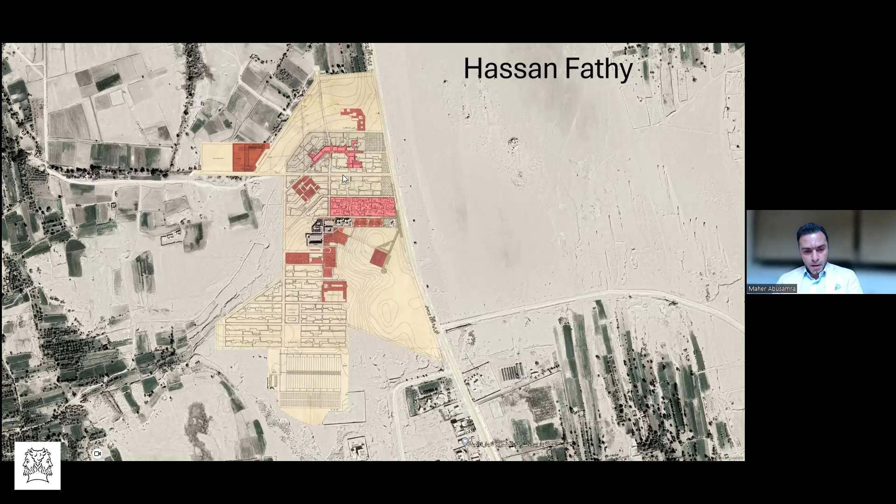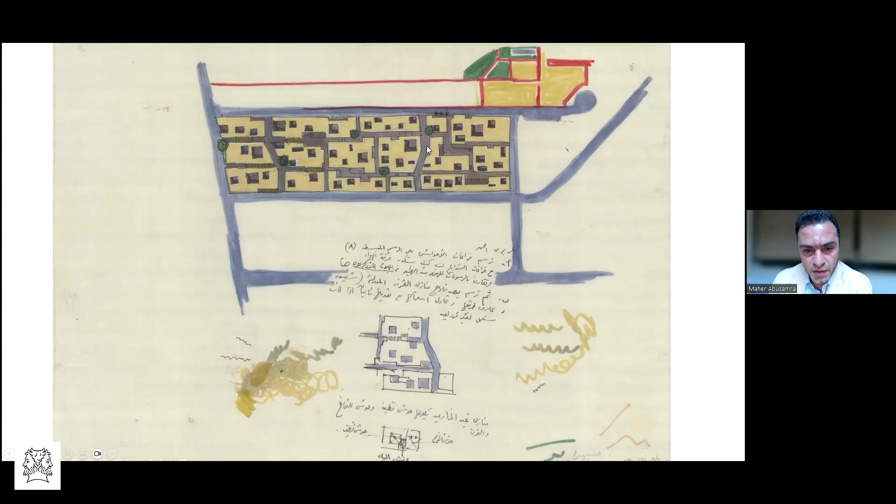Here, this is a close-up of what we have. 1, 2, 3, 4. Some of the project is completed. The rest is not yet. Here, there are original sketches from Hassan Fathy and some instructions about the courtyard and the ventilation, how he imagined that city. Some of the project I even started to draw on computer to understand and feel the module and his design principles. To understand his work, you have to draw it.

Here we can see some of the center of the village on the left, and some samples of the housing and how he can play with the form using that internal courtyard and small street in between. Here also some sketches, original sketches from him.

Then when I was learning Hassan Fathy, when I was looking at the floor plans and the sections and elevations, I saw the drawings are very simple, and you must build that project in 3D on the computer to understand the levels, what's happening in the ceiling, and what's the relation between the walls and spaces to understand the form.

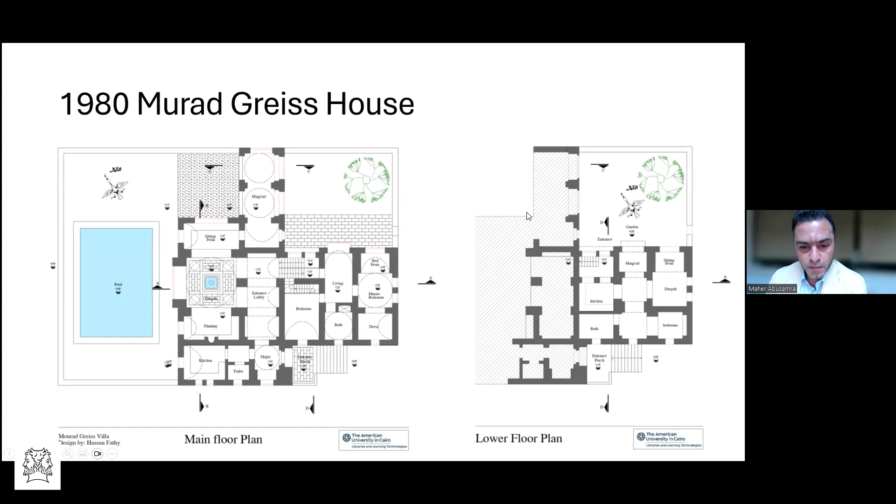They have a lower level courtyard and loggia overlooking the pool. On the right side, you can see the lower level, the stair going down from here. You have the courtyard at the lower level. These are some drawings I extracted from the model itself, some sections, elevations. Here we have an original floor plan from him. And maybe on the left, there is an alternative previous design, not the one which has been built.

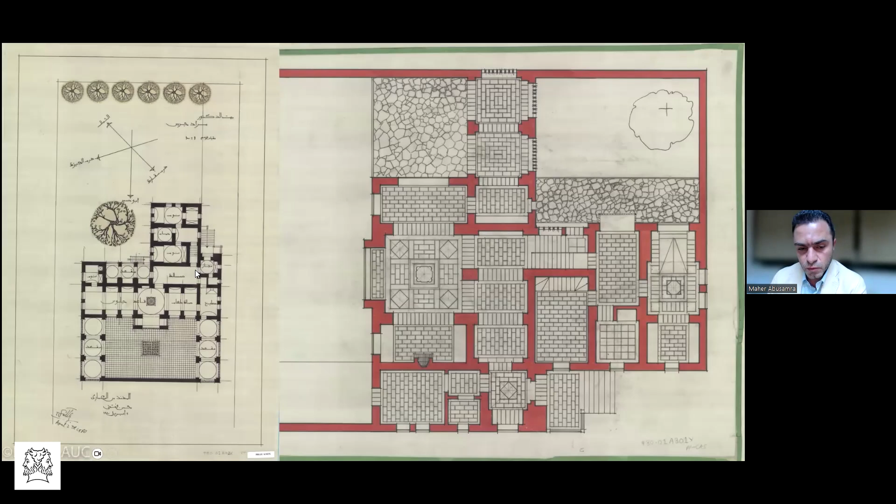These are the images of the project. There are a few projects of Hassan Fathy built of stone in Egypt. Most of them are out of adobe and brick, mud brick, but some of the projects are built out of stone, like this example here, depending on the location of the house and the surrounding material.

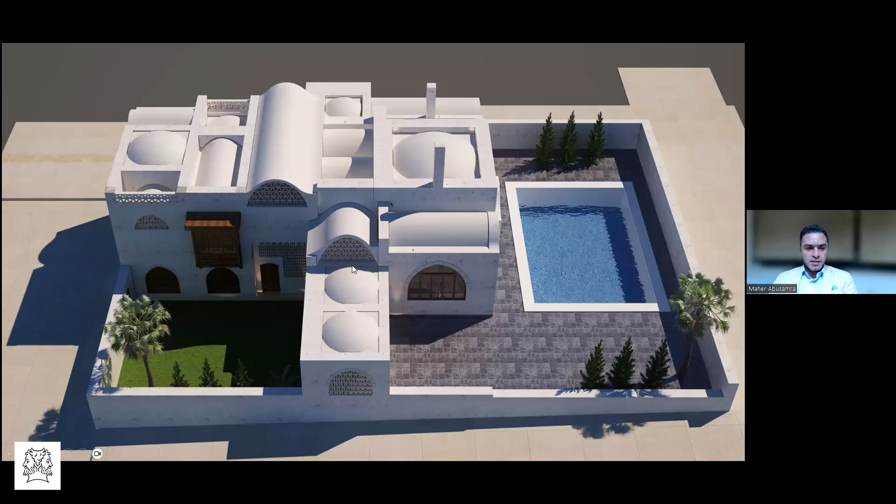Here, I'm showing how, after I build the model, I can extract some 3D images from the model. This is the exact design from Hassan Fathy. We can cut the model to understand the relation between the movement of the forces from the ceiling. You can cut the plan to understand the levels also. Some nice shots.

Then I have to talk about Abdel-Wahed El-Wakil, who is a well-known architect, still practicing until now, and based in Qatar and the UK. I worked with him on maybe more than 40 projects, and until now we are still working on some projects. He is one of the disciples of Hassan Fathy, and I stayed with him about 10 years. There is no single day he didn't talk about Hassan Fathy. Until now, daily he remembers him as a master.

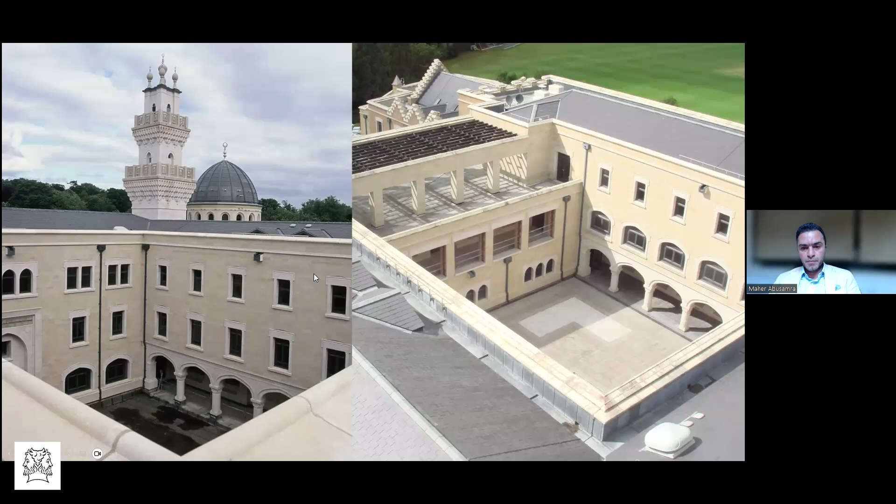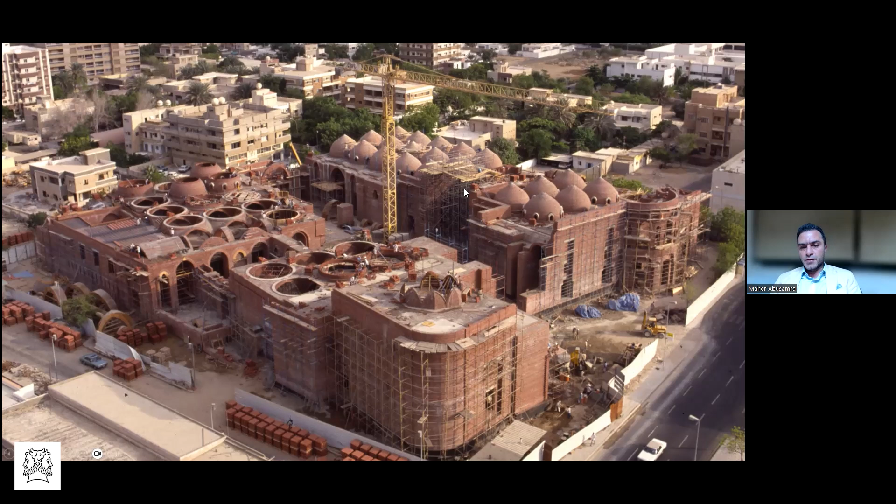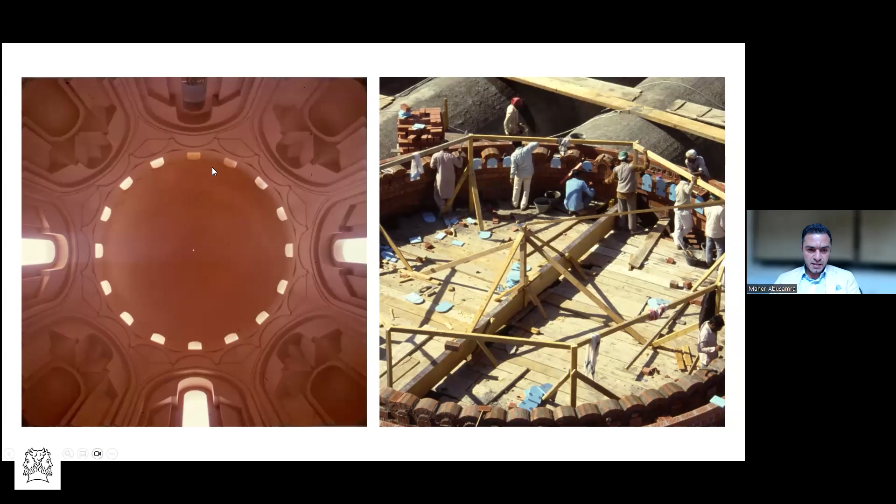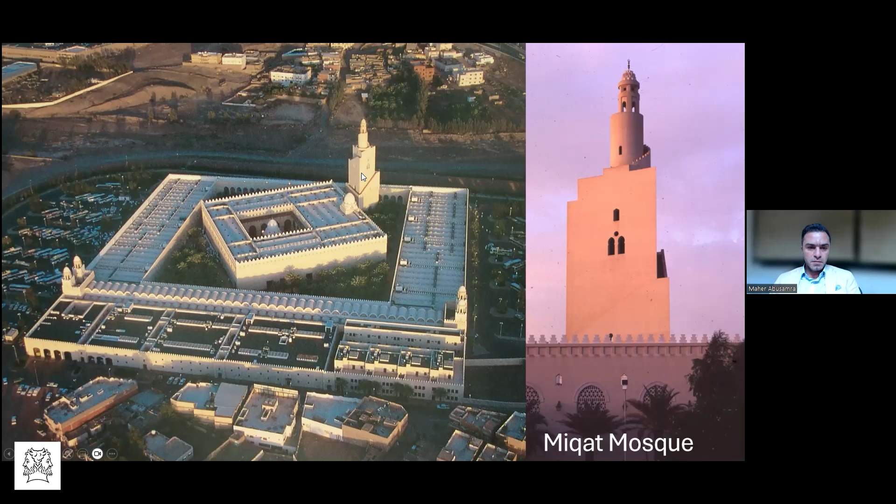This is another big project also, which is Masjid al-Miqat. It has a really huge construction site, all of the site out of brick, of course. We have the mosque at the middle, courtyard, inside the courtyard, and the ablution and the toilets, because this is serving Al-Hajj Road. So we have a really big number of services all around. And the minaret is on a spiral plan, similar to Ibn Tulun minaret in Cairo. These images are from Al-Miqat during the construction.

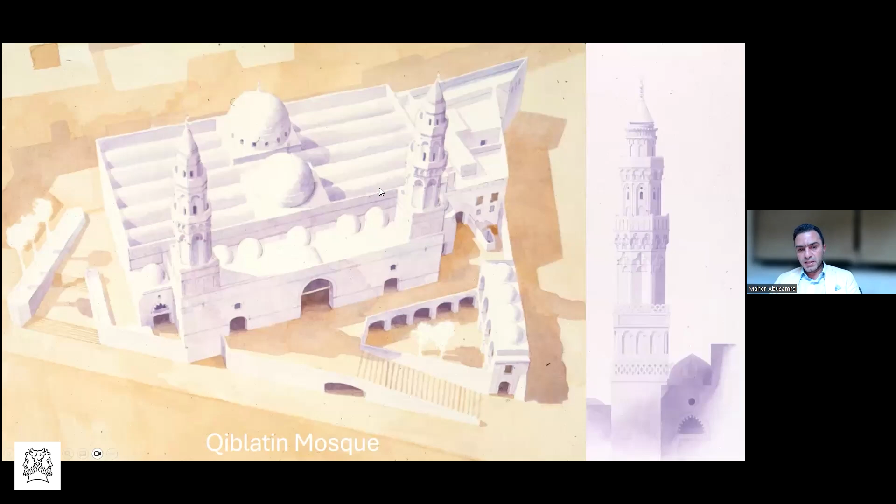So working with Abdel-Wahed El-Wakil and Hassan Fathy affected all of my thinking and converted me to, like, a traditional architect. When I started working here, I went against the reinforced concrete. I'm trying to use the stone, which is the available material in Jordan. And this is the first project.

It's a small house with a small courtyard and Arabic Qa'a, which is the main dome at the center, dome on squinch, with two iwans, right and left vaults. And I'm trying to build different types of vaulted ceiling to learn and understand the behavior of the forces when we are using the stone material.

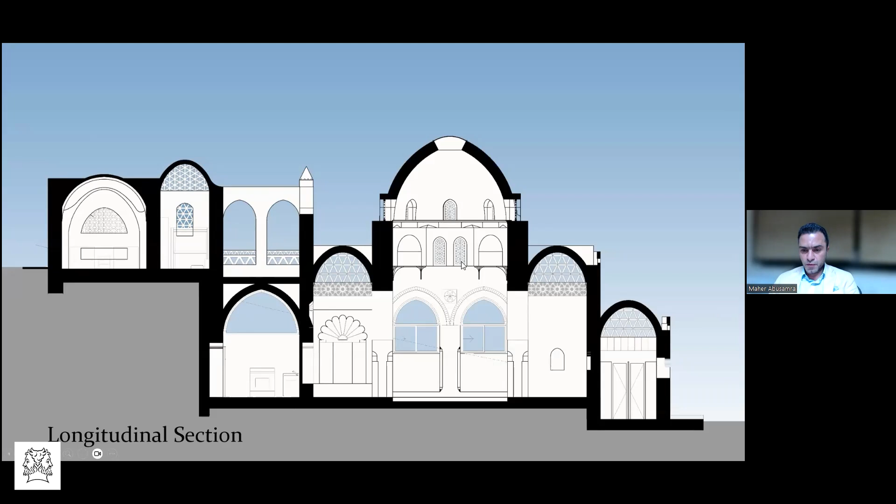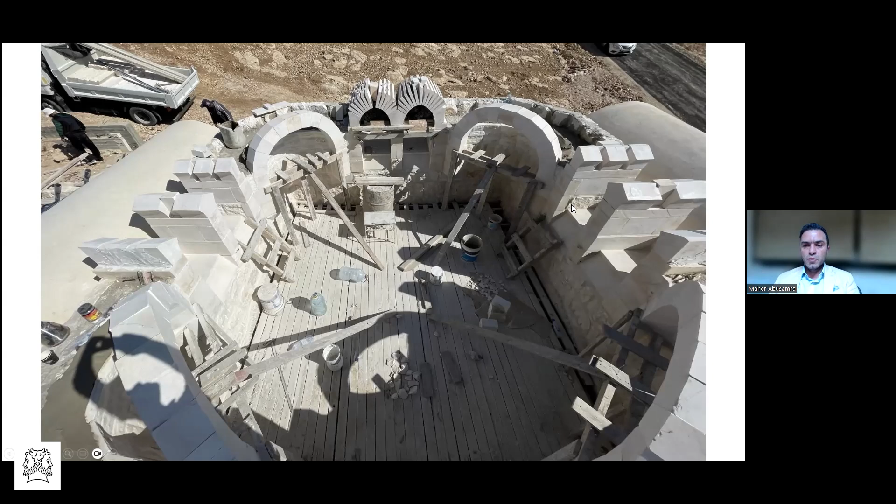Here we can see the 4 squinches before we finish that part of the drum. Down you can see the scaffolding at the square of the space, which is still square. Then we have to convert the square to octagon shape to easily rest the dome above that shape. This one is during the construction.

Here, I'm trying to explain what we are using as a material. This is all stone material. I have tried a lot of types of formworks. This is one of them. We're using extruded polystyrene to carry the arch or the vault before we finish and put the key and remove the extruded polystyrene.

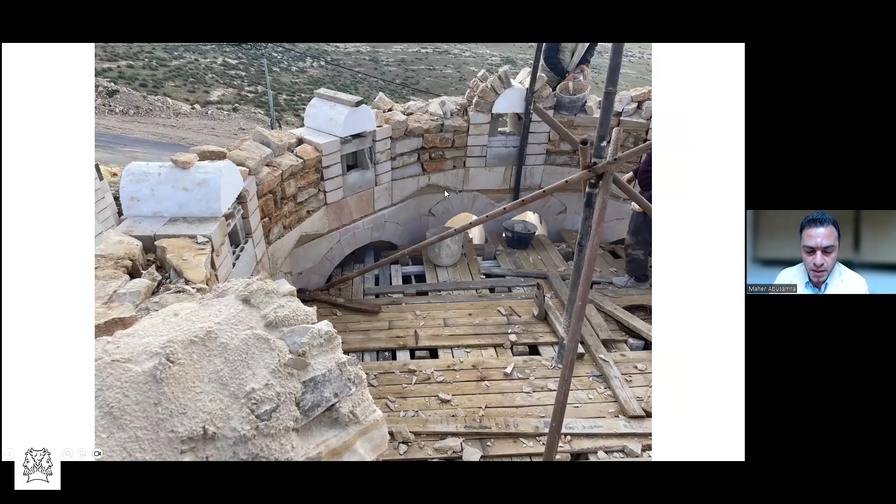Then from the octagon, we have a 16-sided polygon. So we have this piece here to convert the 8 to 16. Then we can start building the dome. This piece we can see here with this shape, and the interior looks like this.

Most of the stone I used from the excavation. When I excavated the land, we extracted more than 1,000 cubic meters of rocks, so we used it. Here, different parts of the construction.

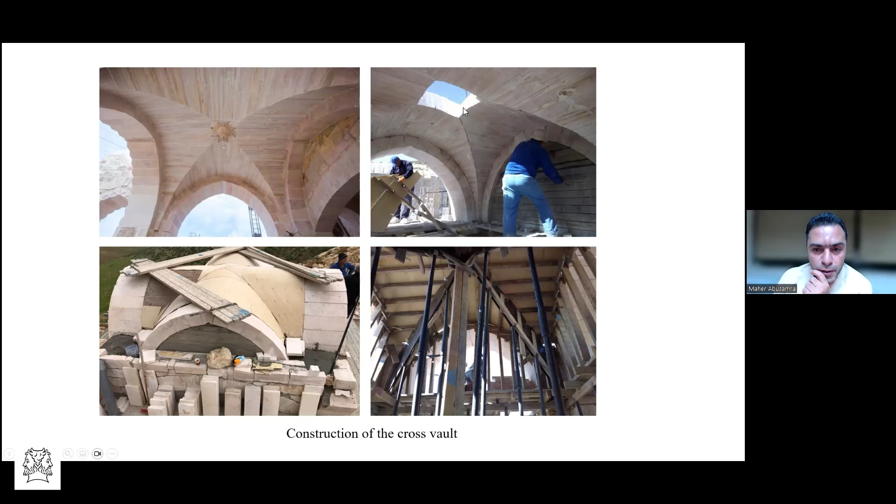This is a cross vault. We build the 4 arches first, then we have here on the lower left the scaffolding to have the cross vault, and then rest the stone pieces, always perpendicular to the curvature. And this is the outcome at the end.

Here we use a very, very light formwork, which is only a steel bar. We put 2 of them and construct these big pieces of arch. And we have this manual crane, electrical crane. After we release and put the keystone at the middle, we can easily remove this formwork. So it's not expensive, because even the steel bars, we can reuse them again.

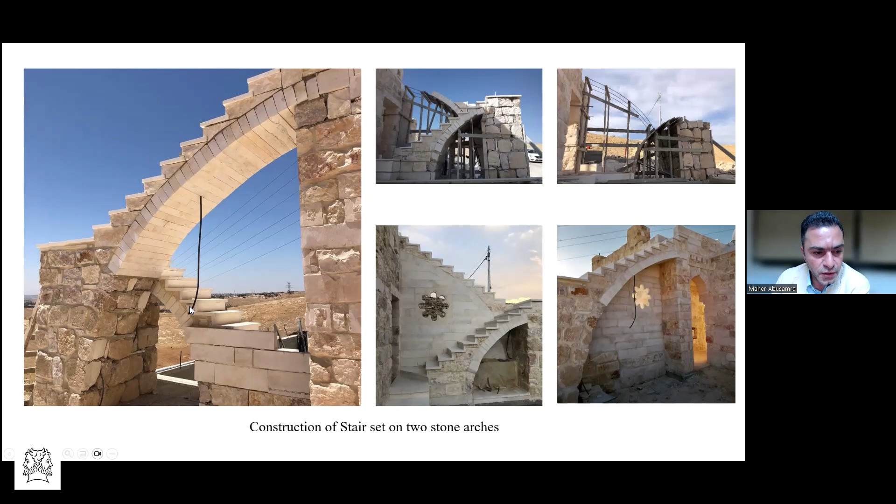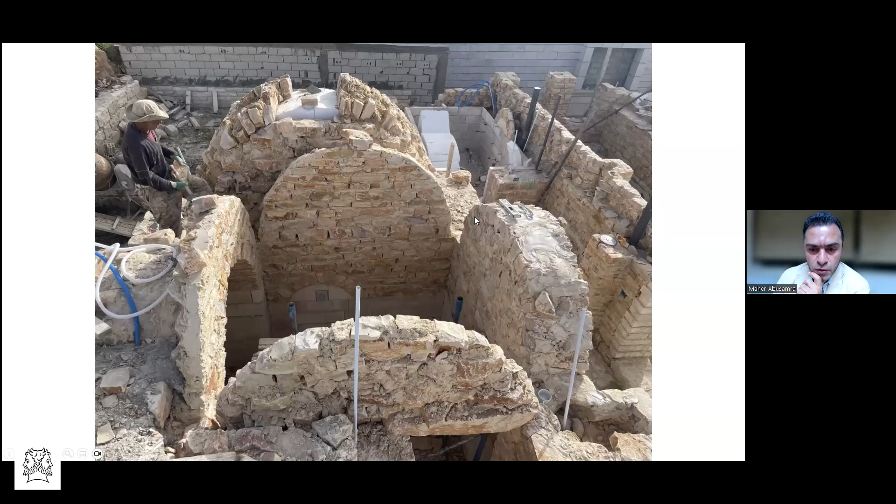Here I'm showing the shallow dome or the sail vault, how we construct it on site. If you have 4 sides of that square, you have to build a half round wall on each side. Then you will start closing the pendentive between those half rounds. So here, before we close the sail vault or the shallow dome, we have to build 4 semicircle walls. Then we close the corner.

Here, that's the guide rotated from the center. And also we have an outer guide to minimize the thickness of the section of the dome itself, starting thick from the base, and then it gets smaller.

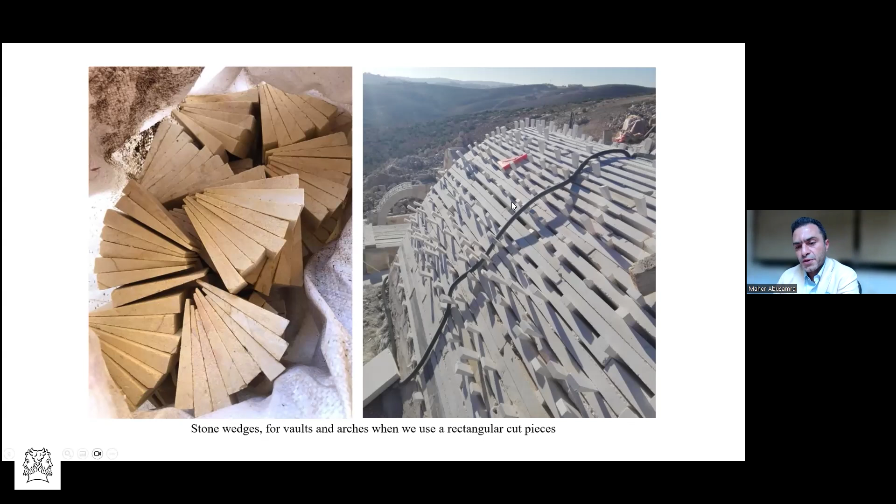Some of the techniques we used, like cut stone wedges: we used the stone available on the market here for cladding, which is like 5 centimeters wide. I tried to use it for the vault itself, so it will open from the outer radius. You have to fill it and adjust it with those stone wedges, and it's a very easy way of construction. You can finish this vault, like 2.5 meter span by 4, with maybe 2 laborers in 2 or 3 days, easily finishing that vault.

Here we built the vaults for the qa'a, the right and left vault, before we started building the drum of the dome, to use the thrust forces coming from the right and left. So we have to finish it before starting to build the dome, to push against the other thrust forces coming from the dome, and keep the resultant within the wall thickness. Here we use lime to finish the vault from outside.

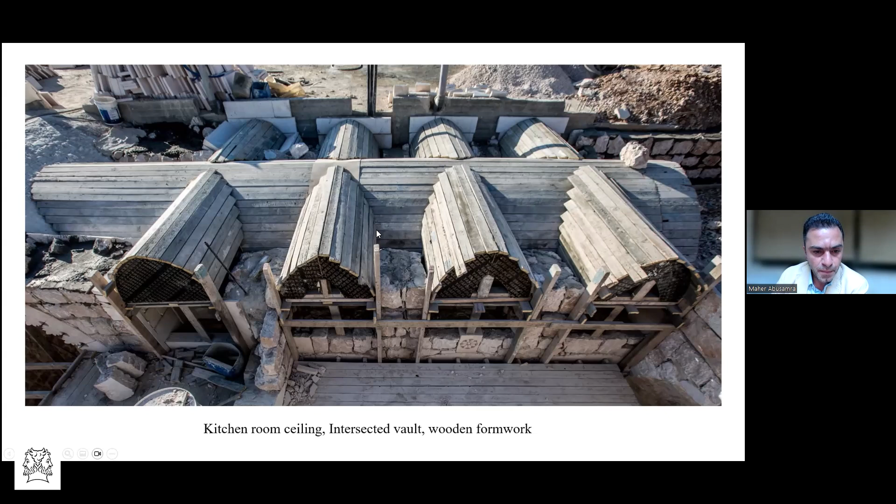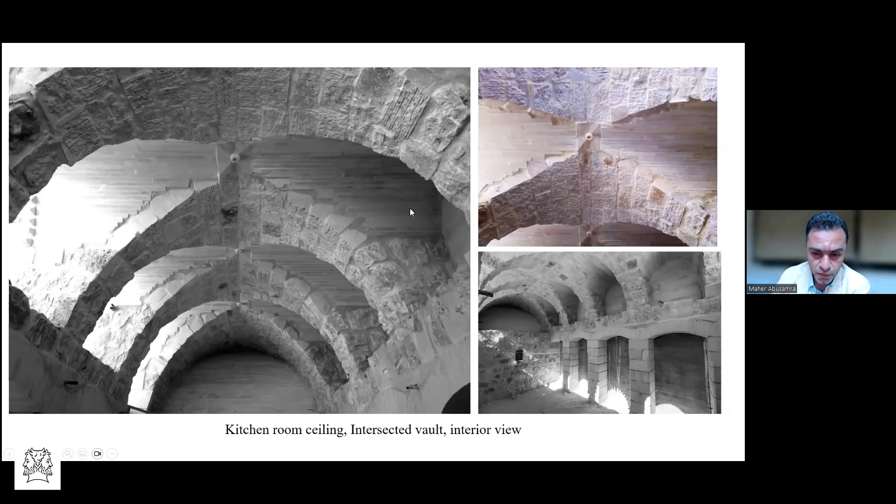Here, in one of the spaces, we have an intersected vault. So we have one main vault intersected by four small vaults. And this is the image after we finished the construction. And this is the interior of that space, using two different types of stone also. Some of the ornaments and carved stone pieces I did myself with a chisel and some electrical tools.

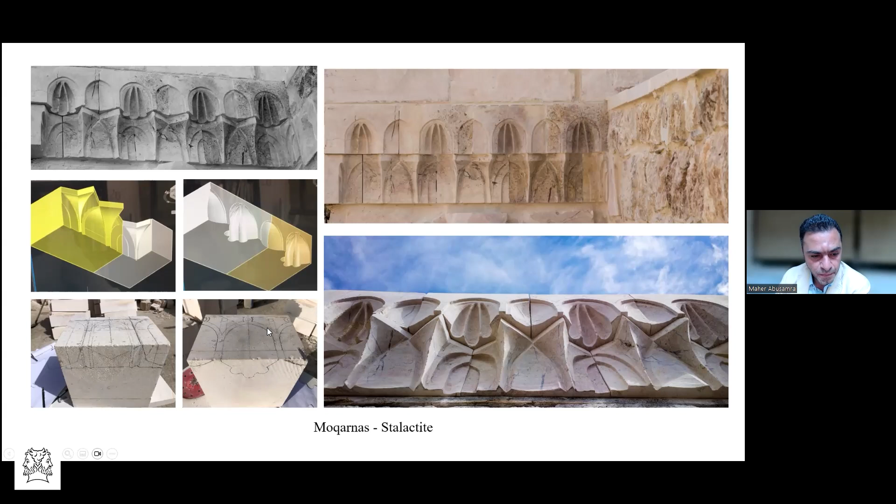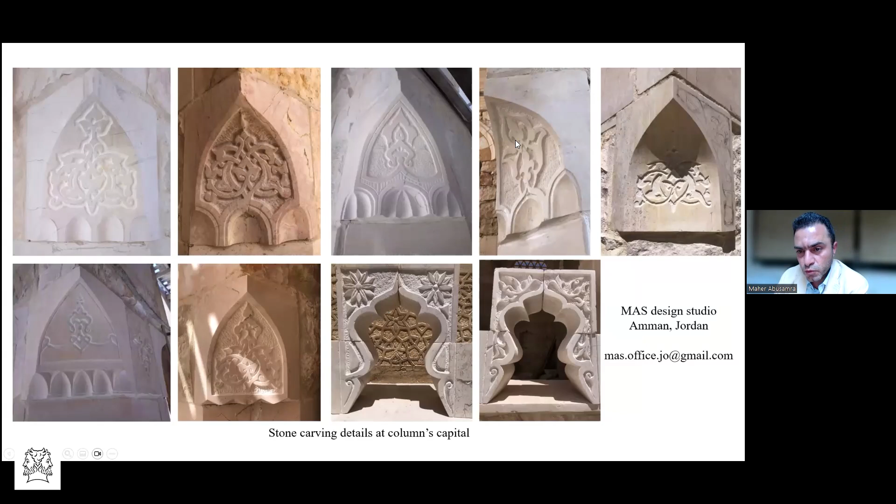Here also some floral pattern, which, when I have free time, I go to that column or part of the wall and do on site after we built it.

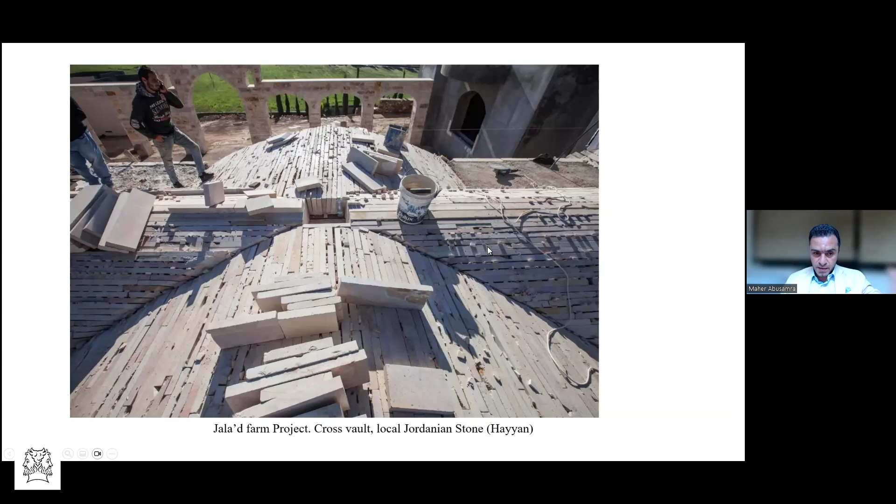Another example I did in the Jala'd area, which is another area in Jordan, Salt. We have a very big drop-off area with the entrance canopy here, so we did a cross vault at the entrance. This is the car coming from here, and this is the drop-off. Underneath, we have an 8-meter span cross vault, which is a big one. This is the formwork before we started the vault. Here you can see the stone raised on the formwork, and this is the result after we removed the wooden shutter. The span, as I told you, is a big one. I couldn't sleep before we removed the bolts because I was afraid, of course.

Here I did a real corbel with twin columns. This detail came out because sometimes there is a modification on site to the design, and that modification brings the project another way. Before, we had a column in the middle because I was afraid of the 8 meter span. Then the client asked to remove the column. So what I did, I put another round column with corbels to reduce the span a little, to get at least 7, 8 meter span. Then I have this cross vault.

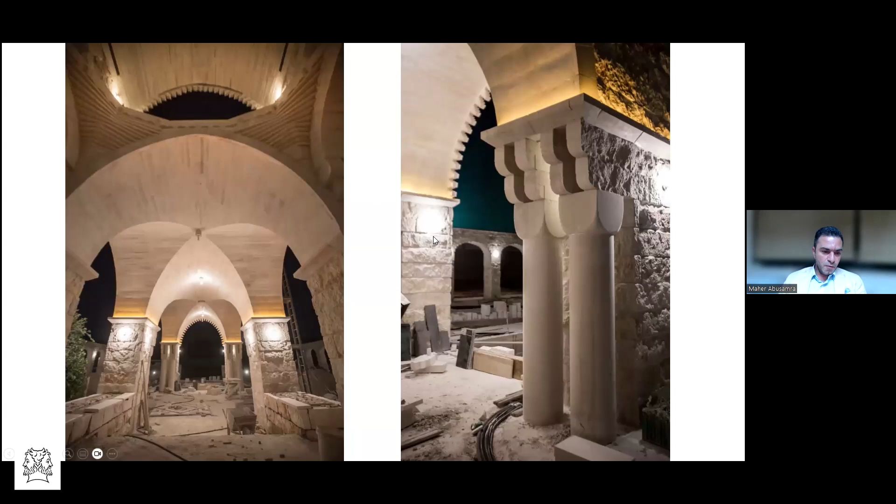That's the space. And we have a double volume here at the entrance with a high ceiling vault. We also did some tile patterns with marble this time. This is during construction at night; we are testing and seeing what we can do with lighting. And I brought architecture students from the university onto this project. They worked 2 months on site and helped us cutting the marble for the floor pattern and building the vaults, and they really liked the work on site.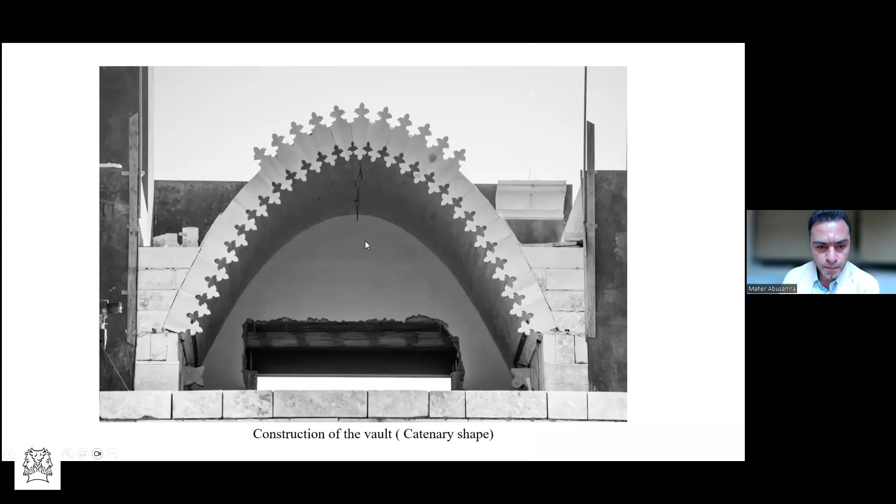Here, showing some tile patterns during the construction. Here we can see the cross vault also at night. There is another house, a farmhouse in Jerash, which is also a historical place near Amman. We did a three-centered arch vault.

For this arch, we divide the span into 4 equal parts. Then from the first center, C1, we draw a circle, cut it from the 60 degrees going down, repeat that from the left center, and at the intersection of that 60-degree cutting, you will get the third center down to get smoothness of the quadrant connection between the two arches. So this is the result.

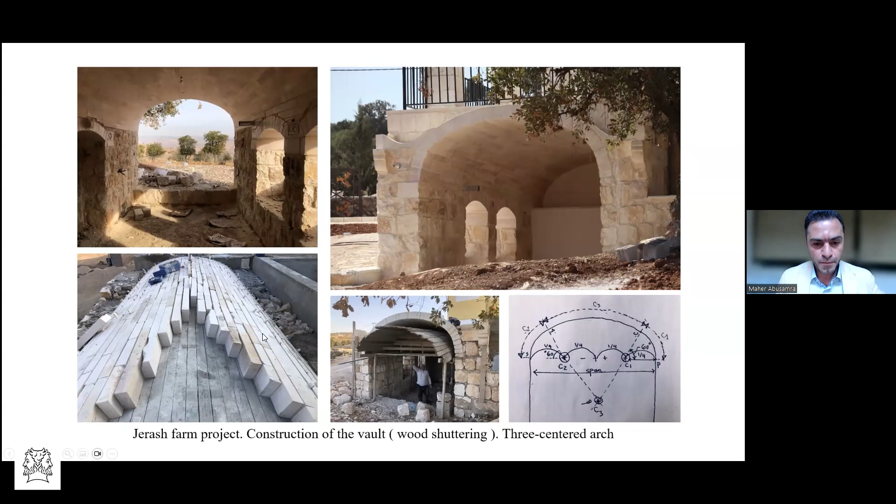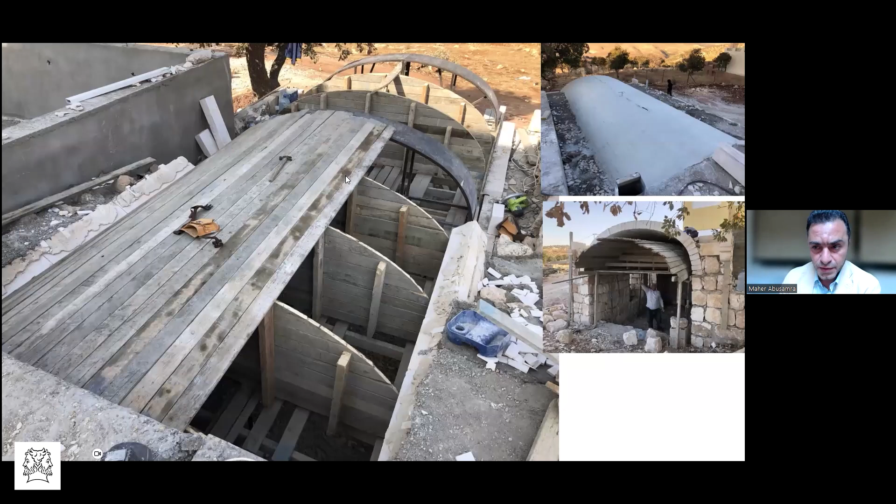Here we used big, wider stone pieces. The entrance porch, this is the only additional element. We have twin columns and some stone arch pieces with ornaments. This is the same room before we were removing the shutter. This is the construction technique. That's the stone structure.

We have a swimming pool, of course, not out of stone, but the arcade around and the tile patterns. I've tried to cut on each arch a different way of ornaments to see the difference. Here, like small triangles, here other details. So every time I'm trying to see what's the easier way or maybe more beautiful output of the arch.

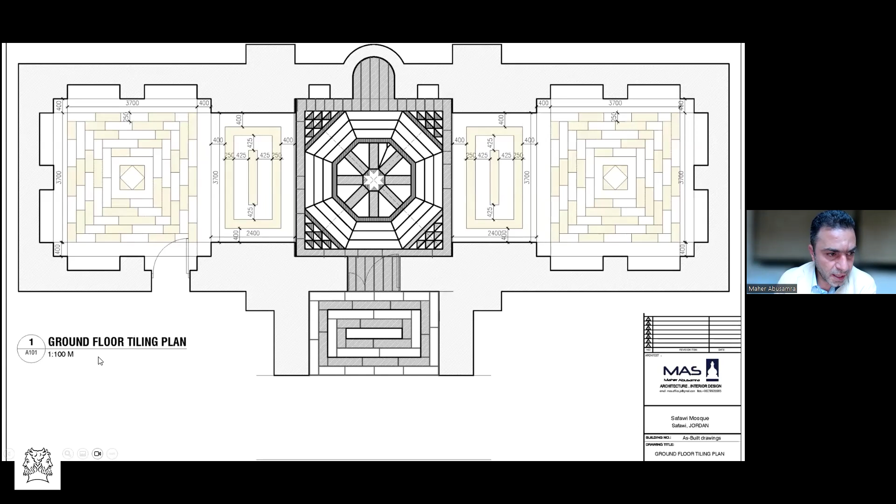The third project here, this is the mosque of the blessed tree. It's far away from Amman, like 160 kilometers, where there is a blessed tree. Tourists are coming to visit that tree. So we built a mosque there. It's a very simple mosque. We have three domes.

At the center dome, we have a dome on squinches. Between the domes, there is a vault, pointed arch, 3/5. And the small domes on the right and the left are shallow domes or sail vaults. The wall thickness is almost 1 meter, so we have these niches to minimize the width of the wall. We have buttresses at the corners of the walls of the main dome, those four buttresses, and this is the entrance.

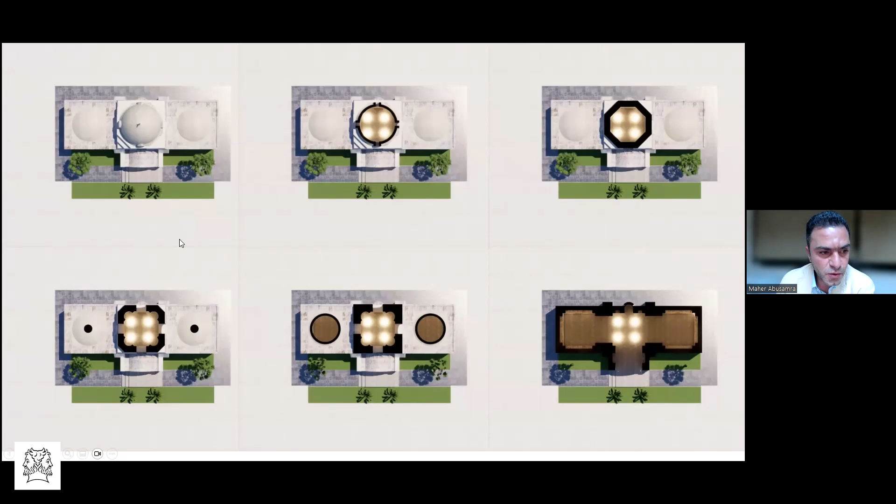Here, this section through the mihrab at the end and the dome on squinches. This is the part of the domes. Here on the graphics, during the design process, from the lower right corner, that's the plan. You then go up to see the cutting still on the two domes and the squinches until the four windows here, and that's the top view. This is the longitudinal section. We can see the sail vault on the left and the right, and the middle dome on squinches. Other sections, from the computer, cutting on different levels to see how the section looks.

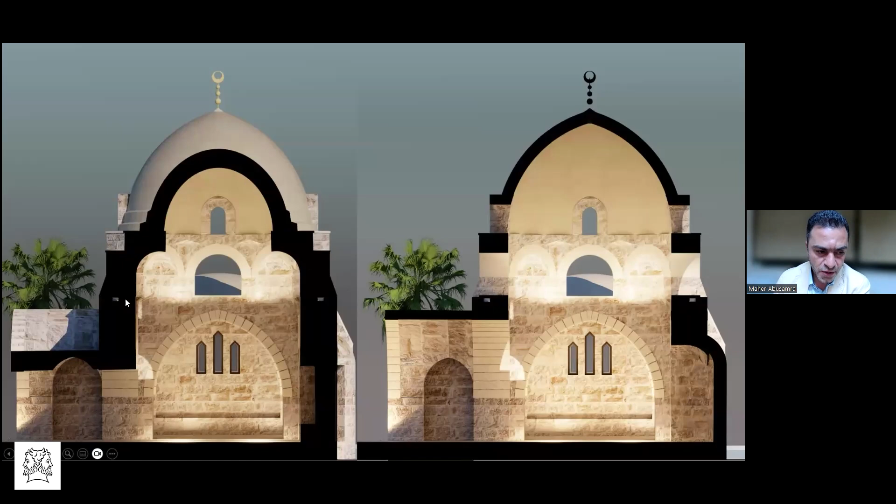And this is a 3D visualization before we start. And this is the result at the end. On the Qibla direction, I have those two buttresses, right and left, and the mihrab. Then we have the dome with those two or three steps, putting some triangles at the corner to imitate the minarets, because we don't have a minaret on this mosque. It's a really small mosque.

Here, I add some pictures about the construction technique. I divide the wall into two segmental arches to minimize the span and also make the wall stronger. Then after those two segmental niches, I built the wall with a semicircle shape to construct the shallow dome or the sail vault. So here we have three and the fourth one at the back.

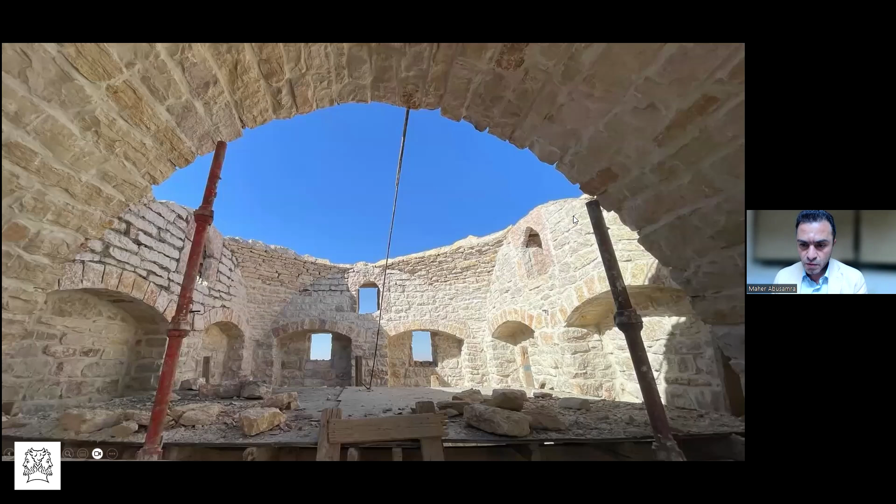Then we start to build the pendentive to close the corners. In this picture, you can see the half-round walls, and we built here the corners, which is the pendentive, to get at the end a circle, totally a circle, touching the quadrant of those four semicircle walls. Here, after we finish the project, you can see the shallow dome overlooking the other side, the recesses or niches with segmental arch and middle window.

Details. In this picture, we can see the squinches, which are carried out not on stalactites, but like cantilevered angles, triangles, big stones going through inside, one above each other, to get the octagon shape. And here, this is the squinches and the mihrab elevation side, the entrance, and we can see here the squinch carried on those three levels of stones.

After we finish those four squinches, we put twin windows in between and get the circle layout and start building the dome itself, also putting this guide rotated from the center, and the builder can move that guide on every layer of the stone.

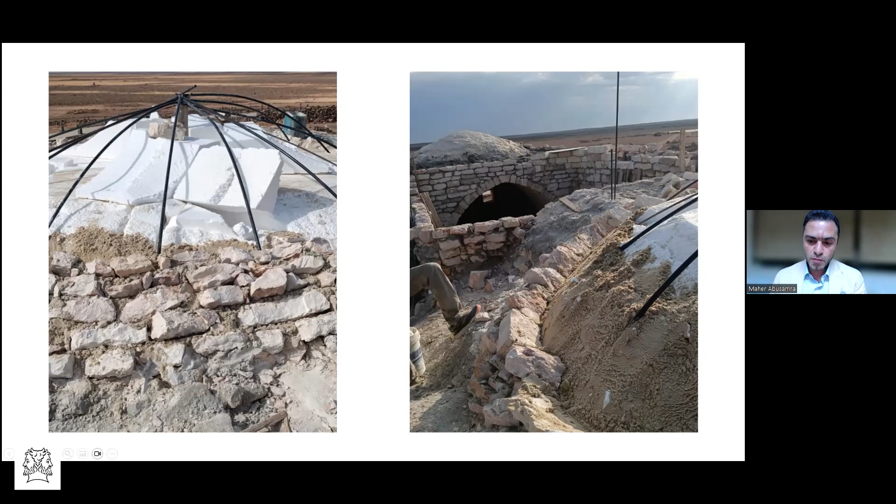Here on the right, you can see we put sand above the polystyrene. And after we finish, we just remove the shuttering, everything falls down, and we keep the dome clean from the interior, because the sand you can easily remove. This is the image after we finished the main dome.

This is the entrance vault here, the entrance porch. We can see also the rainwater drains exposed from the wall, also out of stone. We did some tile patterns with black basalt and white local stone.

And also two universities sent some students to visit our site during the construction, and they had fun. We allowed them to cut the stones, cut the rocks using the wedges, playing with the lime. That's it.

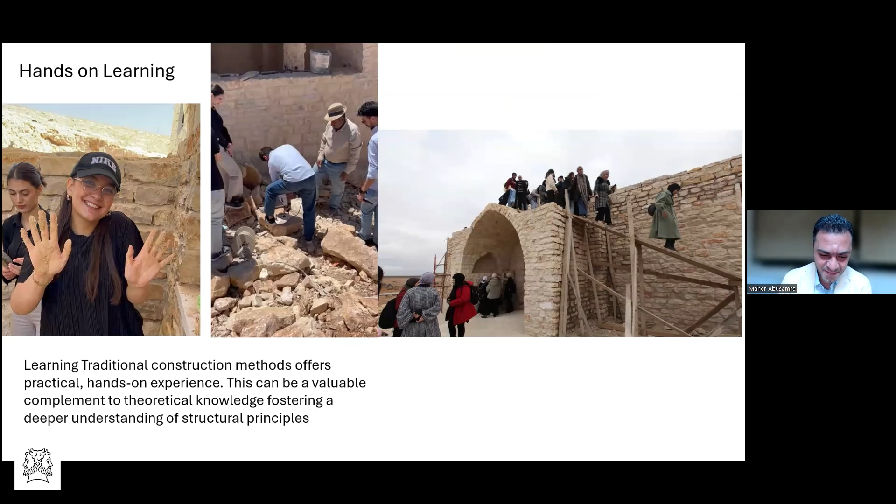I couldn't hear you, Georgia. Can you unmute yourself? Okay. So now we can see our invites.

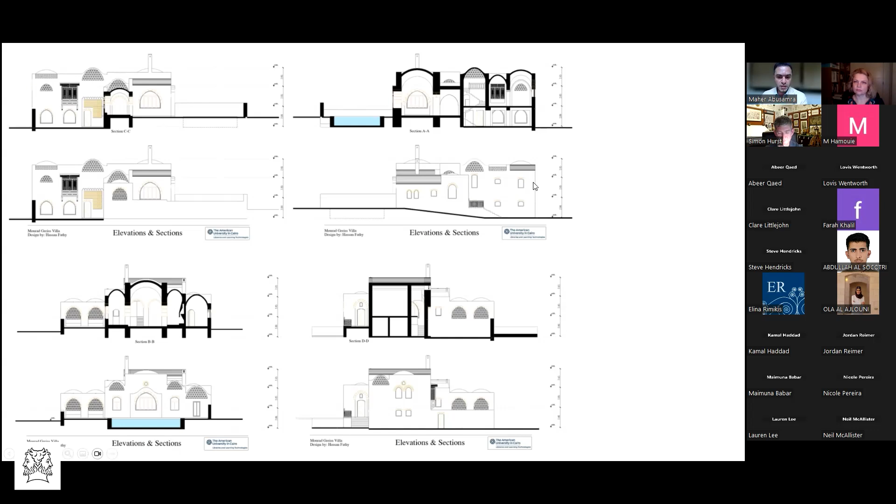Even now, some of the construction sites are still not totally closed, but we can feel it once we have snow in Jordan. It's freezing and snowing, we get inside one of the rooms, and we feel very warm, really. And in the summer, the same. Coming from outside, you feel at least a 5 or 6 degree difference, and the site is still open and not finished. But what I did, I put a provision copper pipe to have air conditioning in the future. I prefer not to install any of them and stay green.

Yeah, 100%. But have you ever studied the cooling effect of those stones in the building? I mean, if you've done any comparison between concrete buildings and those stone-built structures, to compare the indoor temperature. We did studies by others. They calculate the thickness of the wall. Let's say you have a 75 centimeter or one meter wide stone wall. They say it's equivalent to a normal concrete with two thin walls with insulation inside.

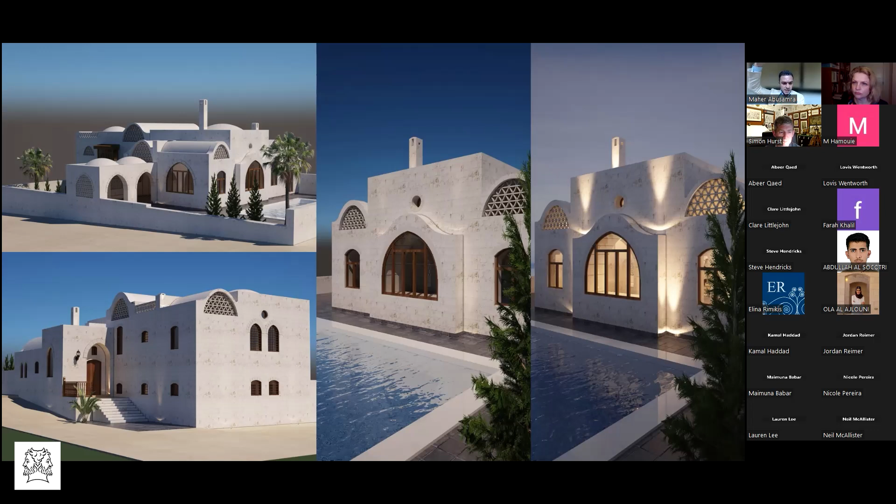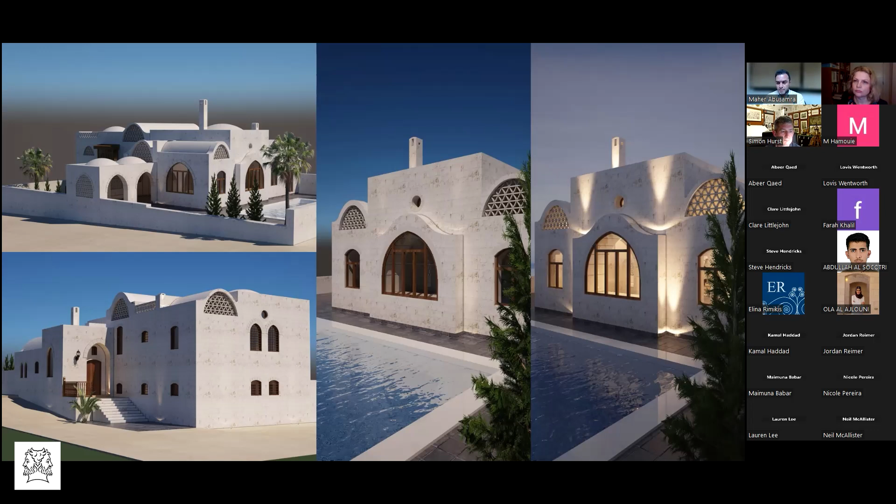But that calculation compares only the material and its thickness. They are not taking into consideration the height of, let's say, this dome or this room, 10 meters, with 16 openable windows at the top, so the hot air can go out and you have ventilation. They don't have, in the system or the software itself, a way to put these ventilation factors into consideration. So we have to try it after we finish that project. All right, thank you so much. Yeah, that's really good. Thank you so much.

Very good question. And I was wondering the same, how much you use practically from the traditional passive means of environmental management, because it was a real tradition in your area of using the natural forces, the winds, the difference of height, of temperature, all those details. But probably after you finish them and you start doing some tests, you will realize yourself how this really works.

Yeah. Also on the gray water, we have like two types of drain. Some we will use for irrigation, and we did some solutions, but like what you said, we have to test it to give later on some real figures to compare.

Yes, we will take now some questions from Clare Littlejohn, who said that she traveled to the site to see your work. Clare, are you there? Hi, yes, thank you so much.

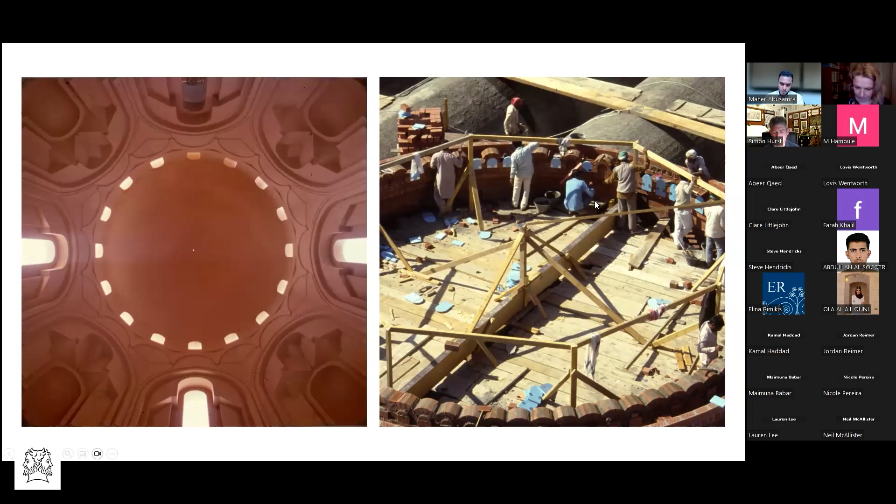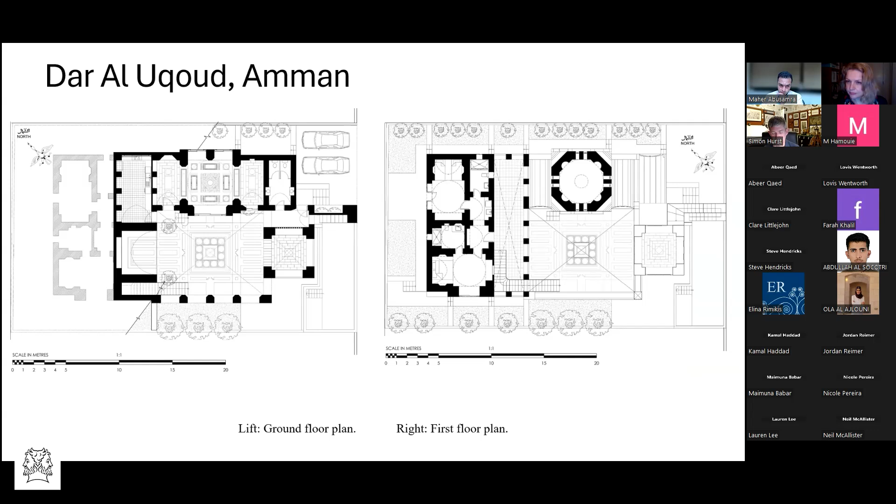This is absolutely fascinating. We've just traveled to Iraq visiting Samarra and Hatra, and went ultimately to Mosul and saw the destruction that had taken place in Mosul. And it was heartening to see them on a UNESCO project rebuilding the minaret with traditional techniques. But it did look like when they were starting to rebuild the city in Mosul, traditional techniques weren't being used to make the beautiful domes and arches in all the old houses that we saw destroyed there.

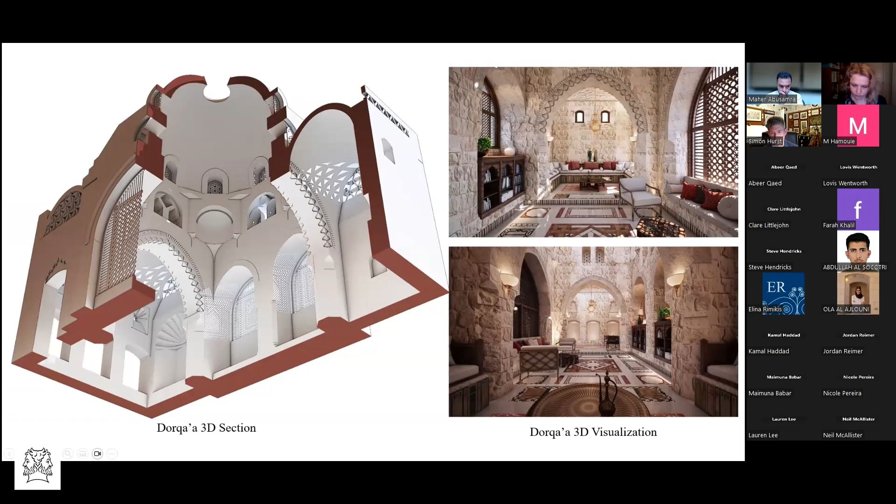And in fact, visiting Babylon as well, it was rather disappointing to see that it had been rebuilt with modern techniques. I'm involved in heritage architecture, and I just wondered if there is any mandate from UNESCO to build in a more traditional way. And can I just say it's absolutely wonderful to listen to Maher and the way he builds, because it's fantastic.

Thank you, Clare. I graduated from Mosul, by the way. Oh, fantastic. Before, I think there was a competition for building the main mosque, and I don't like the chosen project. I see it like something that could be in Dubai or a different city, not Mosul. Mosul is a very traditional city, with an old downtown with real landmarks, architecture, churches, even you can find some mud brick structures from maybe 3,000 years ago still standing in Mosul.

Yes, but there was very little of that left. The only thing we saw really was around Samarra, many mud brick walls left there. In a lot of the sites where there had been damage, there was rebuilding, but using reinforced concrete, which seemed to lose the magic that the old streets previously had.

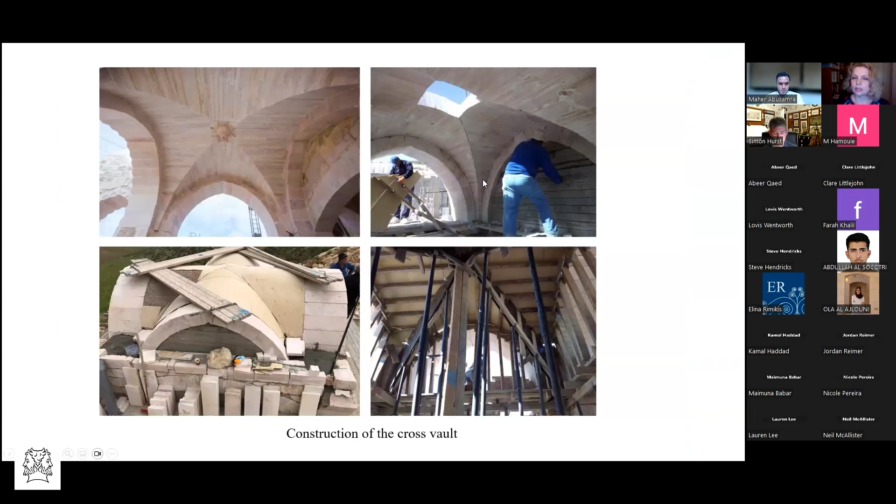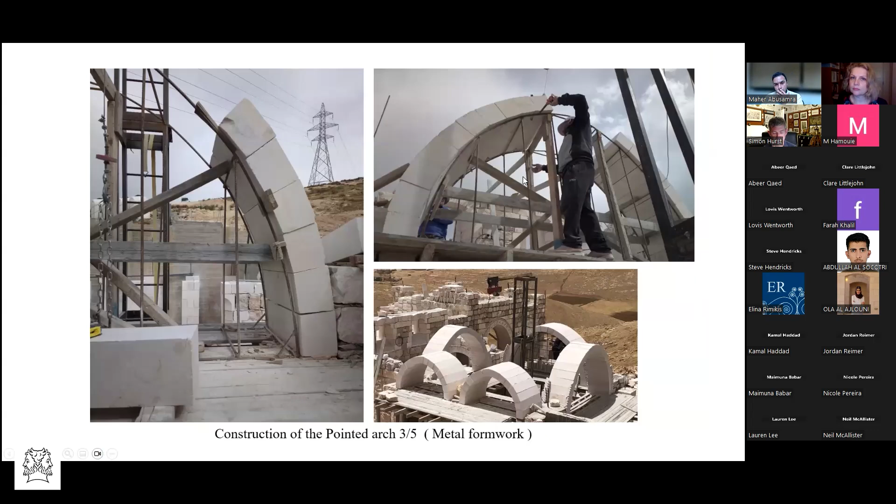Yes, thank you, Mohammed. That's very interesting, because I travel to Iran and have an interest in the dovecotes around Isfahan. And there we could see where they had been repaired with modern fired bricks. And actually, when there was further damage, the damage seemed to be centered on where the repairs had been done with modern techniques rather than using adobe bricks to make a repair.

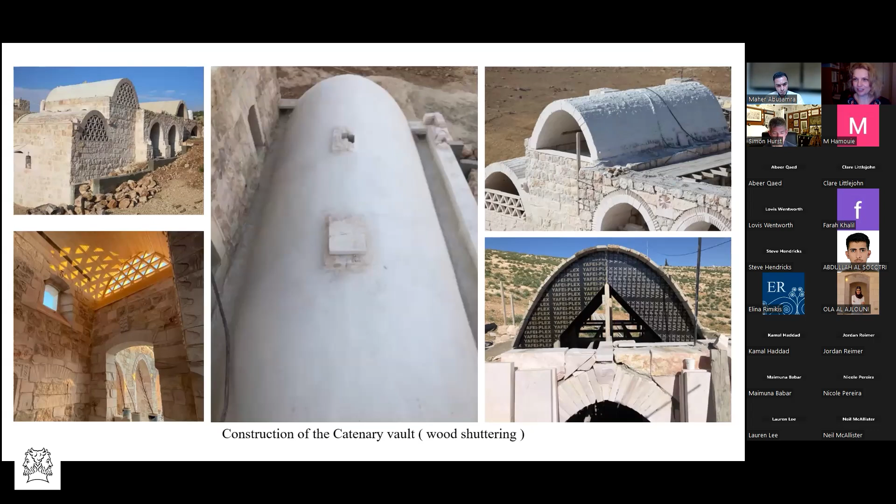Yes, I would like to add something to what Mohammed said. Indeed, INTBAU long ago had a revised Venice Charter, and now it's 20 years since it was released, and we are planning with Matthew Hardy to have a revised Venice Charter, because a lot of things changed meanwhile. And we have somehow to challenge those interventions with modern materials, which contrast with the existing fabric, because from this point a lot of problems start.

Not only aesthetic, heritage related, but also, as Clare said, the new materials are of different quality. They don't behave like the historical ones. And from there, you can practically compromise the full structure if you don't have a good binding of the old and new materials, or at least for them to behave the same way. And in INTBAU, we are working on this.

Next year, TAG, our organization, will have a conference on conservation and how conservation works are addressing new traditional architecture. And this is part of the discourse that we have somehow to challenge this Venice Charter and bring back those two professions together, new build and conservation, not to have such a schism between them, because this is abnormal, it's artificially created.

Riccardo, you had a question about the economic viability of those buildings. Are you still with us? Yes, of course. Thank you. Do you hear me? Yes, we hear you.

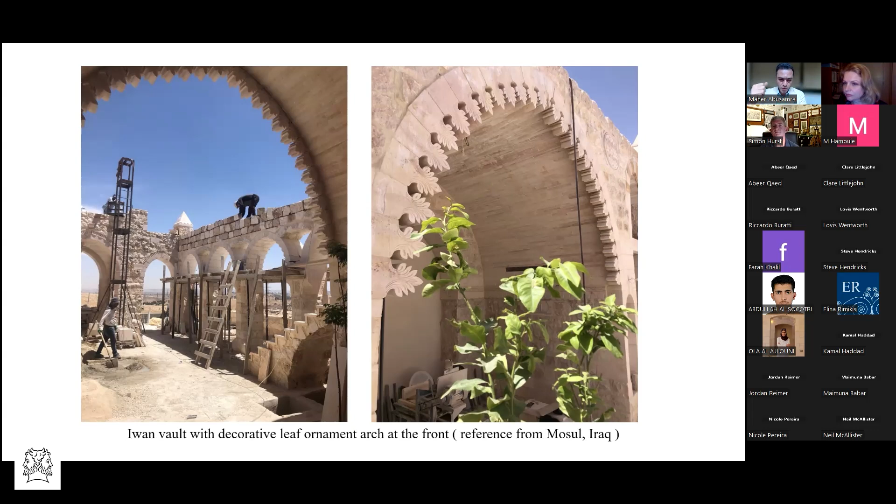The other way of construction is to make the vault with dressed stone, and that requires more skilled labor, to keep the edges tilted a little bit, so the stone itself, if you put it under pressure, will not fall down inside after removing the shutter.

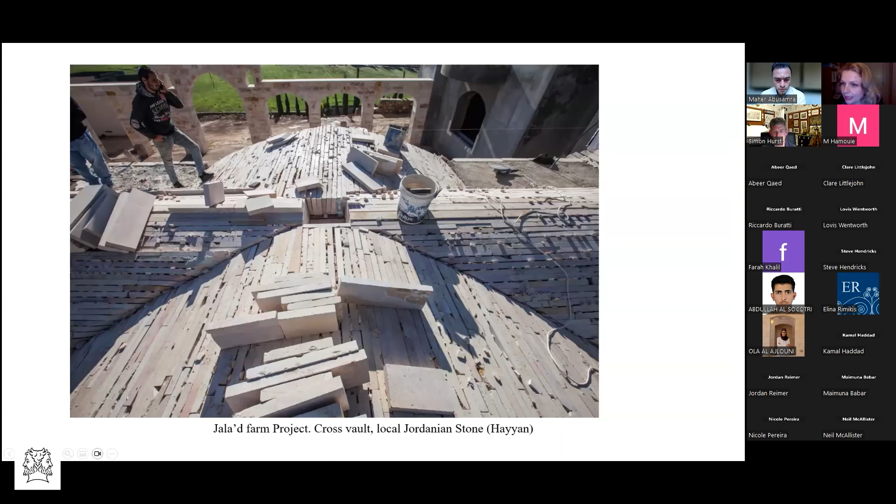Okay, thank you very much. Thank you. We have a question from, I don't know how to pronounce it, Abd Al-Herm Al-Zen. Abdurrahman, yes. Thank you. Maybe it's an abbreviation, right? It's fine. No, it's my full name, but it's normal. I face that everywhere. So please ask.

First of all, thank you, Maher, for your beautiful presentation. I want also to take this opportunity to greet Professor Muhammad Hamawi. I was lucky to attend one of his courses at the Lebanese American University, and he was a great inspiration for me in seeking this path in traditional architecture.

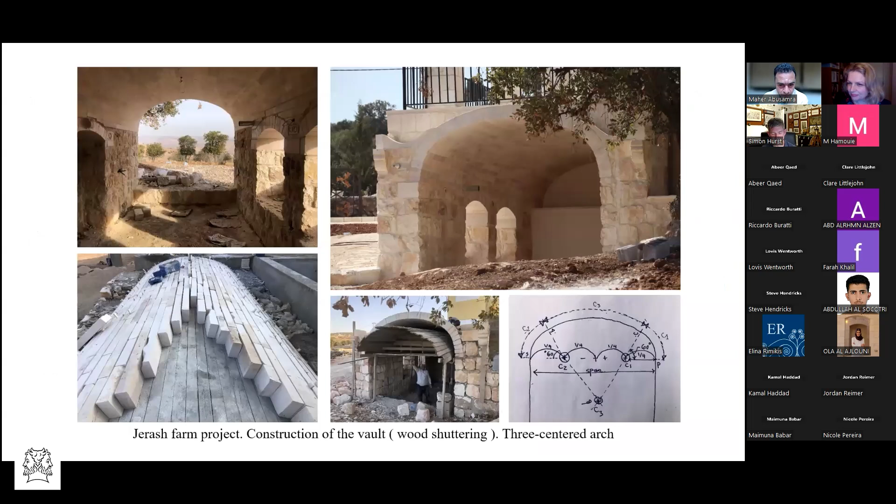I wanted to ask Maher about the wedges and the vaulting technique, but Riccardo already asked the question. But maybe I could ask for further details, like how did you manage to verify it structurally? Because the stones seem very thin.

Did you do any experiments, or did you maybe do any calculations concerning this new technique? And thank you once again for the beautiful and inspiring presentation. Yeah, you are welcome.

There is a rule of thumb for the structural relation between the width of the wall and the opening span. So this basic calculation, I used maybe more my sense. Actually, after we finished the project, I made a calculation in software called Diana for structural analysis, and it gives you the evaluation of the

loads, and it's used, I think, by people more related to historical renovation and treatment. One of the colleagues did that, and the result was really fine for the thrust and for the forces. But in general, when you have a span, you go by 1/5 to get the width of the wall. So if you have another vault coming from the other side, it will be easier and smaller, because you have two forces coming opposite of each other, so the result goes down.

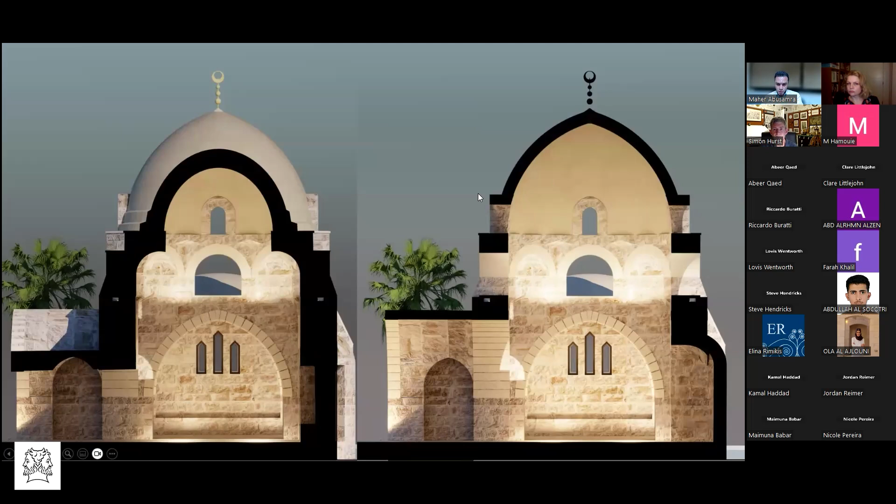And is there any live load going to be on the top of these vaults, or is it just a ceiling and a roof? No, there are live loads. There is also snow here in Jordan. You have to calculate at least 1.5 meter height of snow. But not on this mosque. In that area of this mosque, there is no snow. So we did that calculation and we passed. Beautiful. Thank you so much. Yeah.

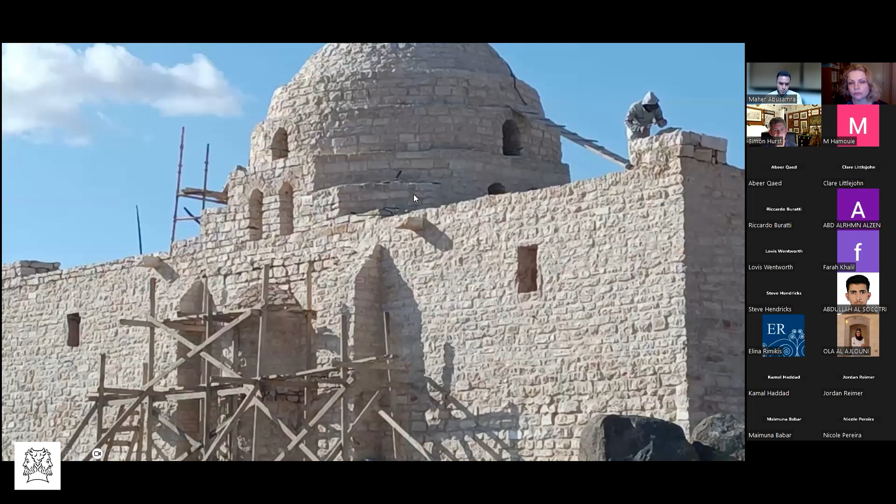Yes, I think if those calculations would be somehow more regulated, it would be easier to have this type of load-bearing stone walls and construction officially approved. Yes, of course. Actually, when we did big size domes and big projects with Professor Abdel-Wahed, we did that calculation before we started the construction, and we put those documents in before we started, and it's done by specialists.

We know a good structural architect in Turkey. He does that for us, and also there is another guy in Egypt. So there are structural engineers specialized in that load-bearing calculation.

So in this case, we have to train more engineers along with more architects and craftsmen, because only with them can we really build legally, and for it to be good practice, not just sneaking some beautiful buildings in between concrete buildings. Yes. If you want to get this regulated and even help the architects or the clients who need this kind of project, give them not only the calculation or approval, give them some tricks from the global experience: how to solve the seismic issues, how to solve the waterproofing issue, how to get more ventilation into the building. This kind of manual will help a lot.

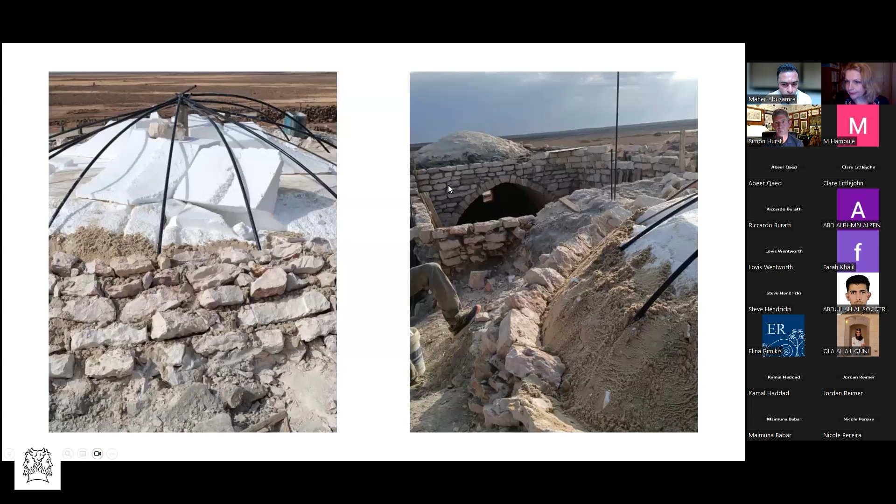We have another question from Abdullah Al Soqtri, which somehow would summarize what we heard here. Are you here with us? Would you like to ask the question, Abdullah? I don't see him engage. In this case, Simon, if you have another question.

Going back to your structural thing. You used three-centered arches, a lot of traditional ones. You also used catenary arches, I noticed in one project, which reminded me of Gaudi and his models using chains and little weights. He hung them, and then you build the reverse, and it automatically stands up because all the loads transfer. But it was more about the setting out of the arch. A catenary arch is not so easy to set out on site with shuttering, because you're not just using a radius and rotating it. So is that more complicated to do on site, or how do you do that?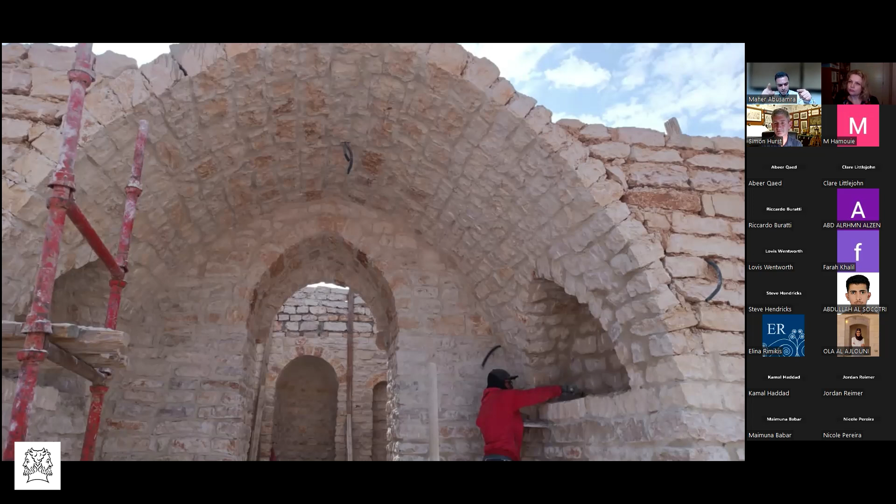No, actually, the catenary is already written by an equation that gives the real shape of the catenary. But what we did is simple. If you have a span, check the semicircle, half the perimeter of the circle, the length calculated by calculator. So I bring a chain with the length of half the circumference of that circle, and then I fix it on a wooden plywood sheet with the exact span I have, and then it will fall down and draw the shape of the catenary.

I mark it on the plywood, cut it, use two or three pieces of them, put the wooden logs on that shape and get the catenary. Excellent, very simple, very elegant. Thank you.

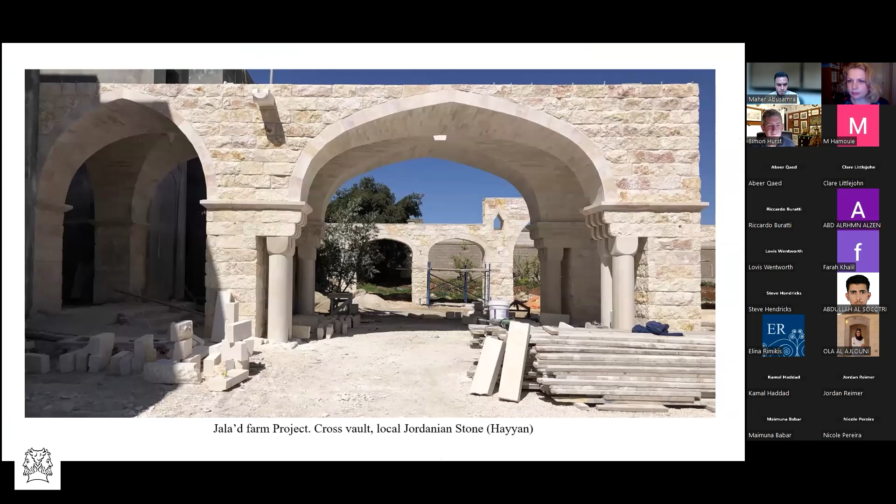Are there any more questions from the public? Anyone wants to ask? Yes, Maher? Can I ask a question, please? Please. Firstly, thank you for the presentation. That was a real joy to watch.

I wanted to ask about the foundations. What materials were they made out of? Was it also stone? Yeah, about the foundation, in the first project I made a reinforced concrete strip footing. The rest of the projects, I made a strip footing with rock stone itself, because I was afraid at the first project. The second, third, and I did 5 projects, all of the footing is stone strip footing. That's it.

Especially when you have solid rock, you're reaching the natural ground. And here our land, if you go down a little bit, it's like a solid rock. So you have bedrock underneath? Stable, yeah, stable. Okay, all right, thank you. You're welcome.

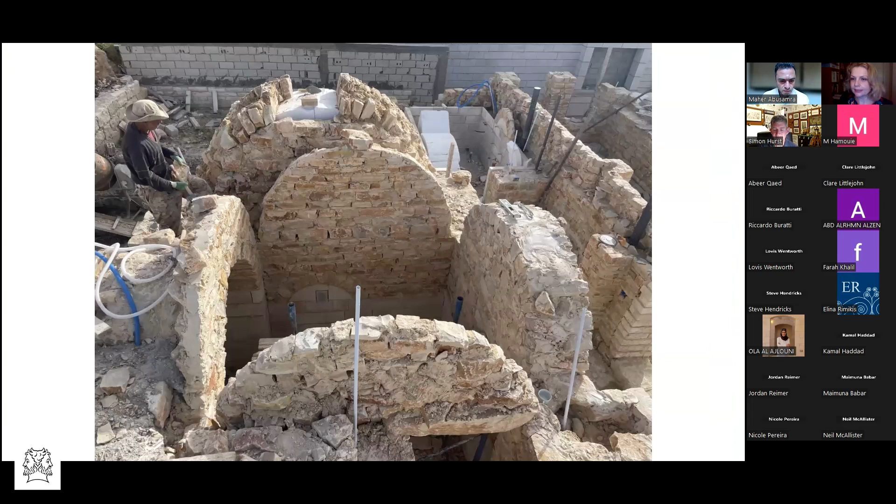So Abdullah, if he's here and wants to ask his question, otherwise I can read it. He said the project is very inspiring, but everyone is asking how we can go back to all those lost techniques. So practically, how do we revitalize the traditional way of building, continuing what your master started? How do you plan to spread that?

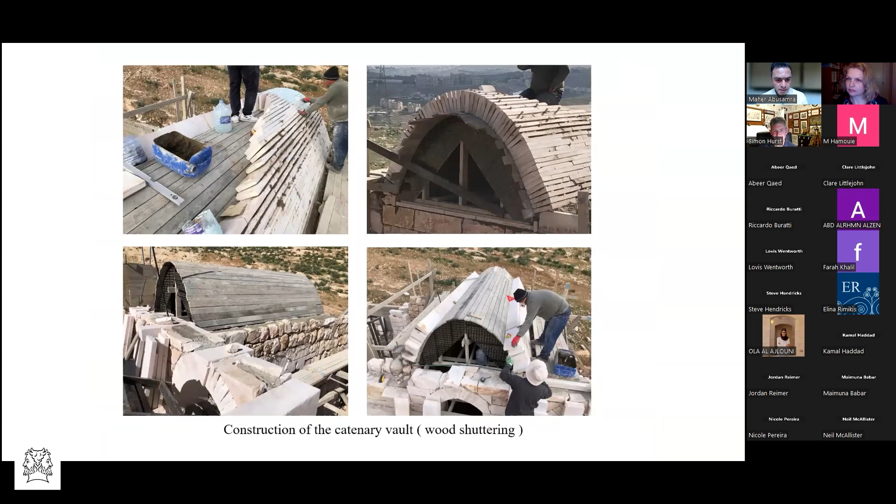It's a very hard question. Actually, when I started to build this one, I'm good at computer 3D, I can draw stalactites, complicated geometry. But when I start working on site, I want, let's say, to do a cross vault. I search on the net, on YouTube, you can find a picture of a cross vault, but how you build it on site, on video, it's not easy to find that kind of material. How to cut the stone to get these sharp edges.

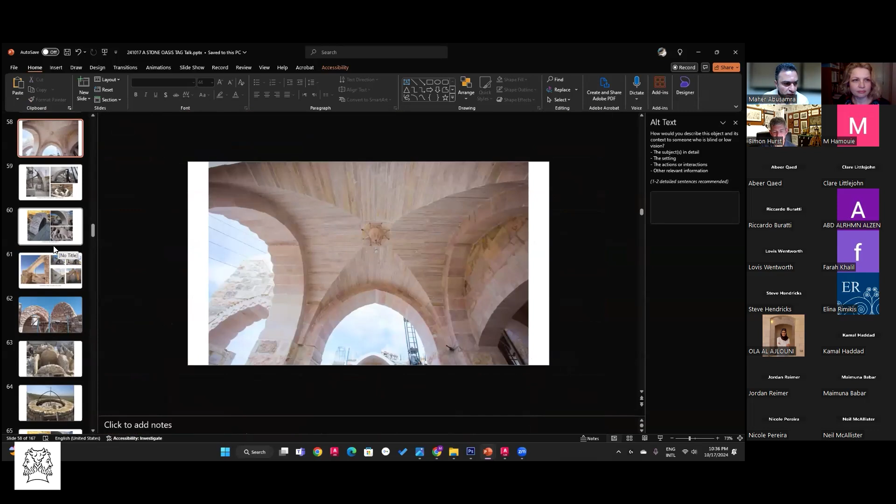Really, it's hard. So what I did here, we have the formwork because I built these four arches, continued that profile extruded and got the shape. Then I started cutting it piece by piece and marking it on site. I put the first piece of stone until it touches this intersected profile, mark it, and I have the grinder near me at the top, and cut it with the edge tilted to make it join between the two pieces.

It's hard for the first one, and I will not repeat this kind of detail. After that, when I get another cross vault, I use a normal stone, and when you're coming to the edge, you can dress it later on or cut it, to make life easier in your construction. So in simple words, you have to stay on site, build with your hand, think and find the solution on site. If you stay at the office, you will not find any of these solutions. That's for sure. So practically you reinvent all those techniques empirically on site.

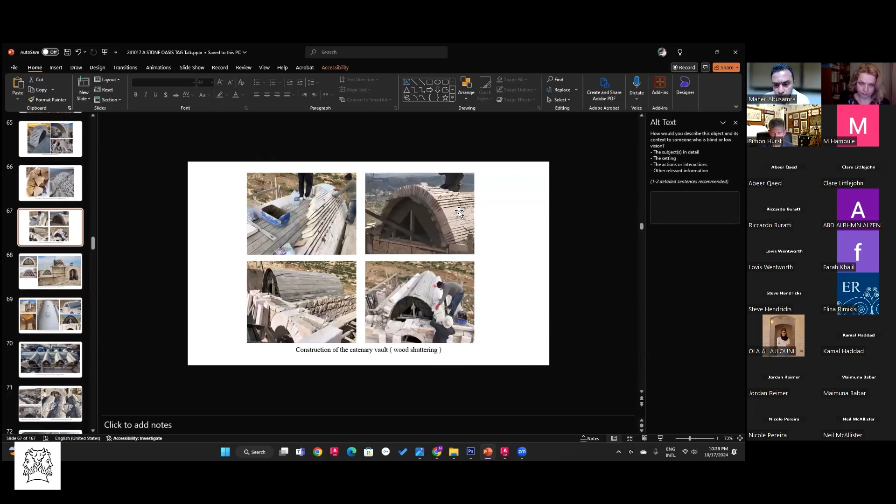Yeah, even those wedges I told you about. The first one, there is an image here. Where is that image? The first one, similar to a catenary arch. This one here, because the thickness of the stones is equal, when the curve gets more curvature, I put wooden wedges. You see this one? It's wooden wedges. Then I have to put some cement, and it's very hard to build. You see the triangle here, you keep each stone perpendicular to the curvature.

Then I said, why do I put a stone, then wooden wedges, then remove them and put small pieces of cement or rocks inside? So we cut these stone wedges and started using them here. It's easier. For each stone, you put one or two pieces of stone wedges. And this one came very easily.

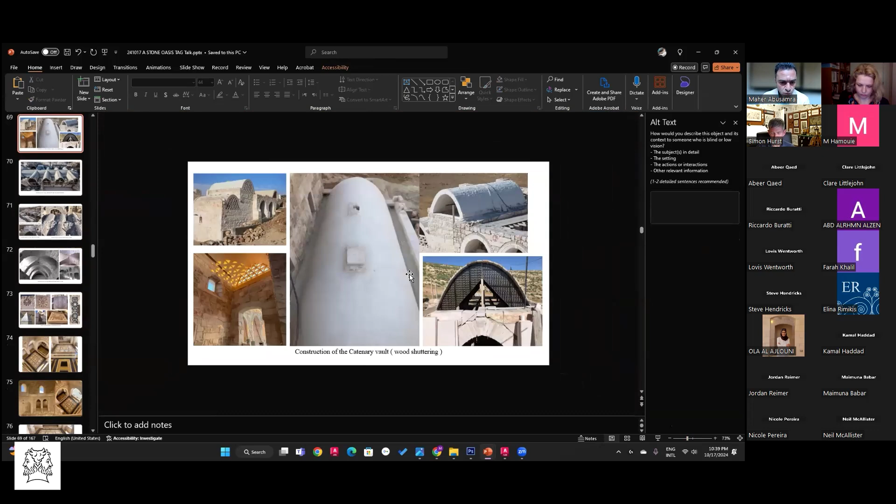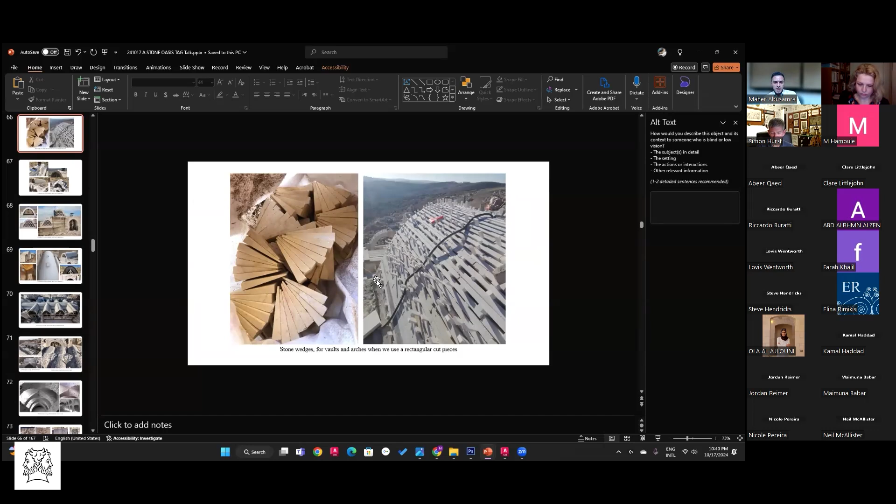We have a lot of 5 centimeter small pieces. In general, you would throw them away from this stone. So we put a guide on the table saw and cut those wedges, and it's easy to use them. So you have to find the easier solution yourself while you are building, by trial and error each time.

Yes, it's very challenging, and I'm wondering if the conservators don't have some books, historical books or other treatises like the Manuale di Restauro, as they have in Italy, so that even if there aren't craftsmen able to build this type of thing, at least it is documented somewhere, and they can try to read those and reproduce what you see in pictures. And also looking at existing buildings to try to understand what you really see.

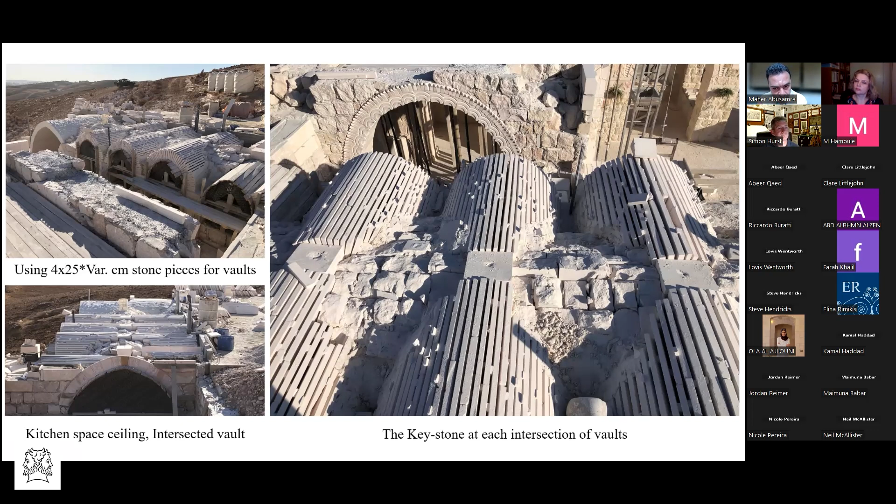Yes, sometimes that's very helpful, when a historical building is bombed or gets demolished in our region. So it's very sad, but at the same time, I'm looking at the demolished image to see what's the content inside, how they arrange the stone, how they cut it, to understand how they built it. Yes, that's why conservation is so important, not only to preserve, but also to perpetuate the techniques of construction, because in practice we conserve to learn how to build practically.

And you mentioned your book. Is this book, The Geometric Construction Necessary for the Craftsman, helping you in understanding those issues, or only the geometry? Yes. It's helpful, especially because the book targets the craftsman. So let's say you are working here on site, you want to do a pattern. I am at the top of the dome. I have a question: where is the octagon? How to draw the octagon inside the square?

So you don't have a laptop, especially in this area, the Safawi Mosque. We are away, and there is not even electricity on the site. So that understanding of descriptive geometry and how to draw shapes on each other is very useful on site.

And is your book published yet? It's published and was on Amazon a long time, but a few months ago I checked to order one of the copies. It's not available. I asked the publisher; maybe the copies are finished, and I'm looking to find another publisher, maybe even to translate it to English. Yes, or in English, please. Yeah. Before, they had a plan to translate it into three languages, but I think there was no budget.

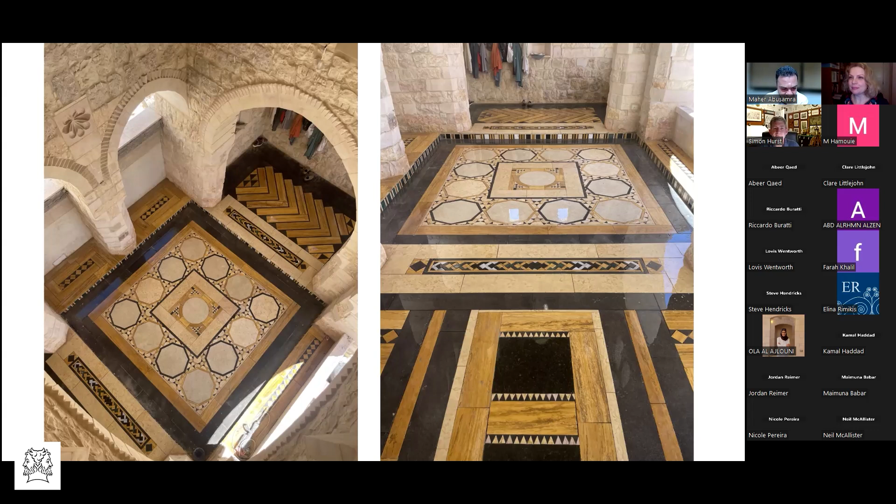Yes, you see, that's the place where maybe INTBAU can help. Yeah, who knows? Please make an application for a research project, because this is very much an INTBAU project and type of approach.